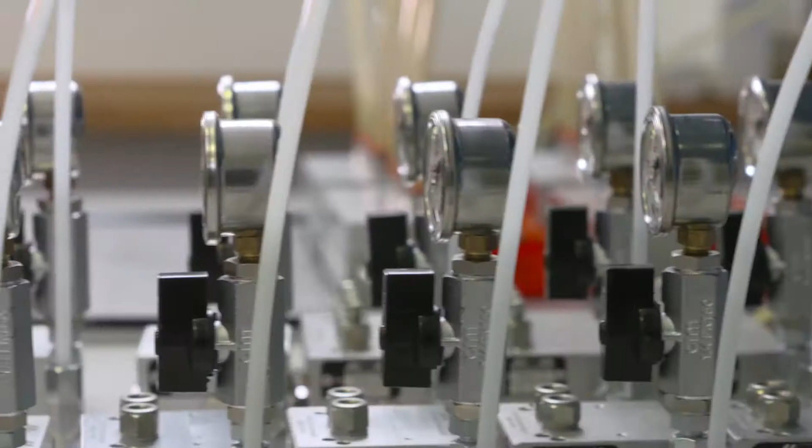MWM Schmieranlagen is an all-Italian story made up of study, insights, passion, creativity and perseverance. It is a story that for over 30 years has brought together creative flair and the rigour of engineering.

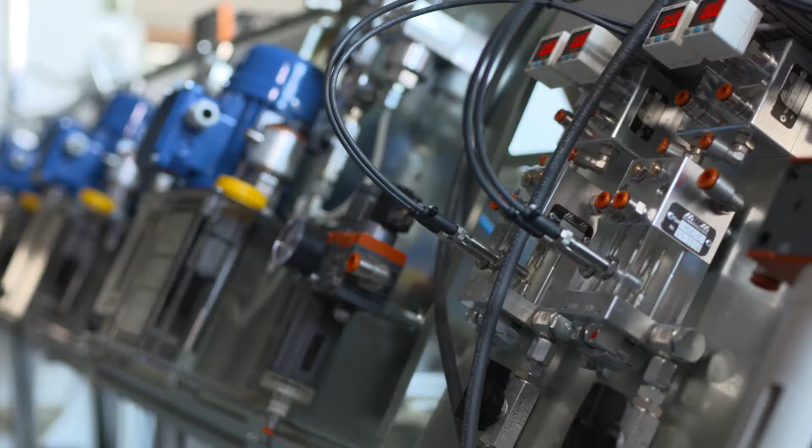MWM Schmieranlagen is a company that operates at a very high level of performance in a niche sector: design and production of minimal lubrication systems. These systems are able to deliver a minimum and extremely exact oil metering for the lubrication of high-speed precision rolling bearings.

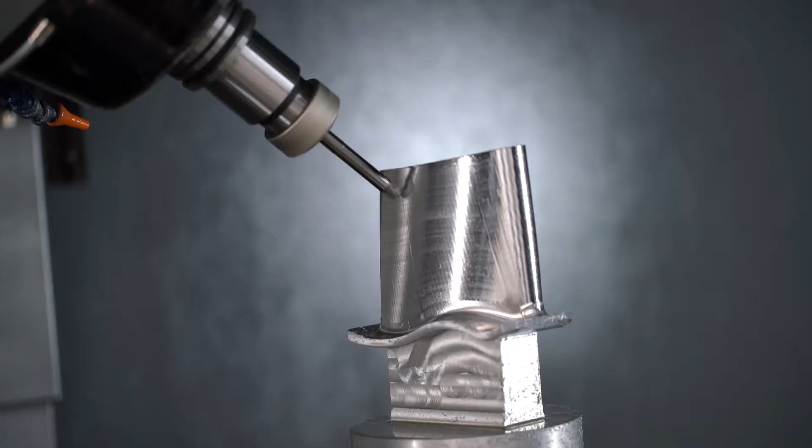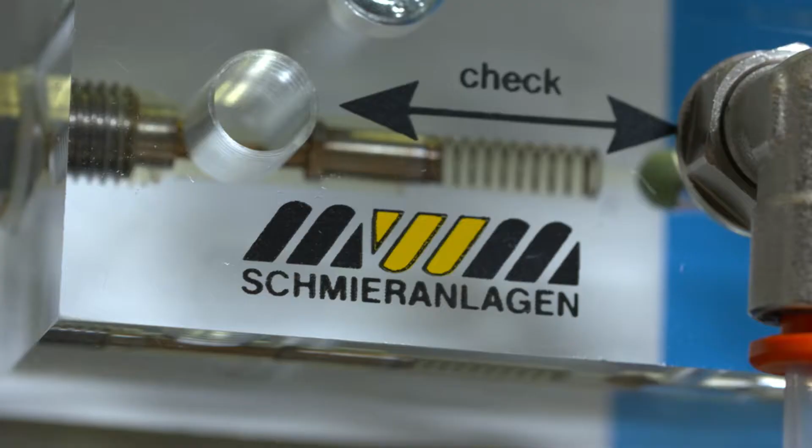Integrating mechanical, hydraulic and optoelectronic elements, MWM produces oil-air lubrication systems with electronic detection sensors. Minimal lubrication is a specialized sector of automatic lubrication technology where tiny quantities of lubricant are supplied in a constant, continuous and controlled way.

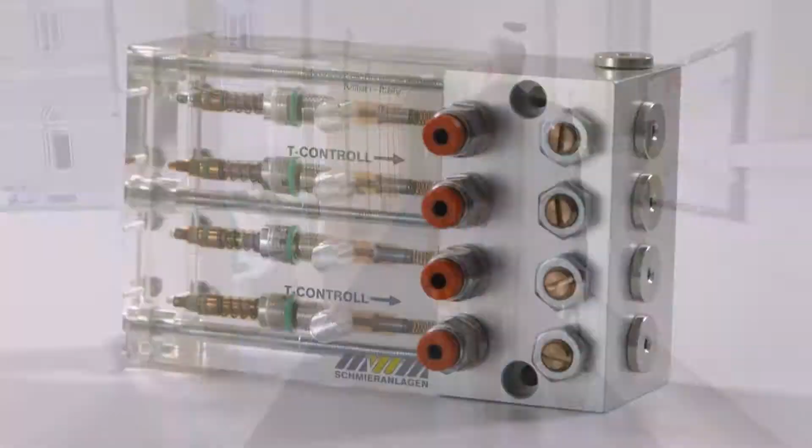The MWM story began in Milan more than 30 years ago, in 1986, when the founder, then 30 years old, graduated in mechanical engineering. And it was thanks to a process of synergic research between the company, its customers and the Politecnico di Milano that the first patents in the minimal lubrication sector came to light.

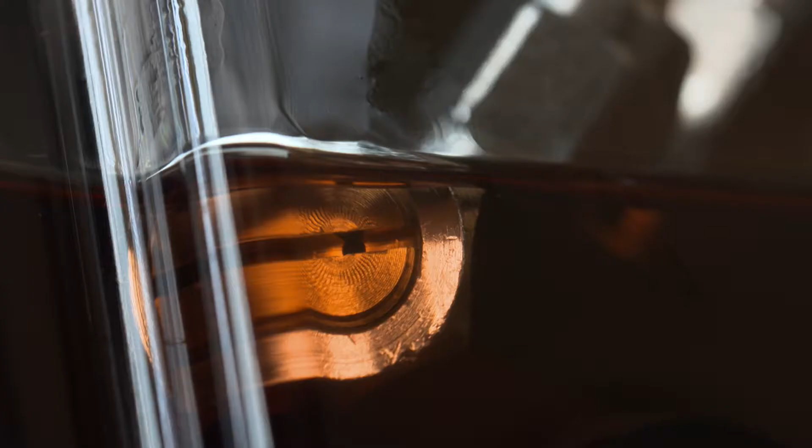MWM was the first Italian company to patent an oil-air minimal lubrication system with an integrated electronic detection device. This technique allows us to combine high performance, efficiency and respect for the environment. Minimal lubrication, MQL, requires far less lubricant and causes less pollution than either mist systems or recirculating oil lubrication systems.

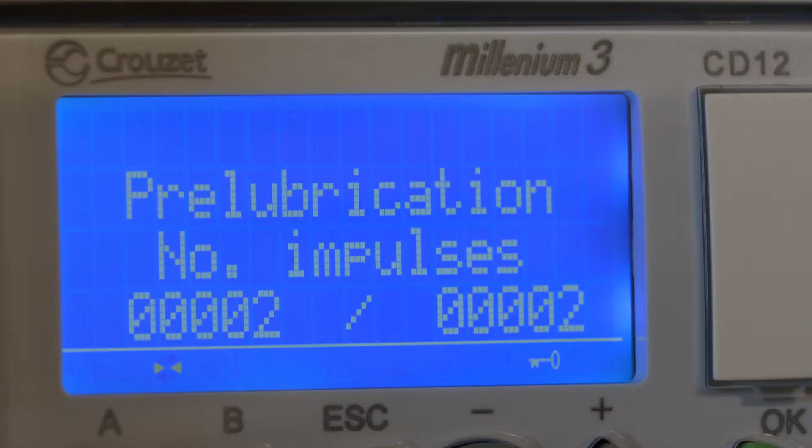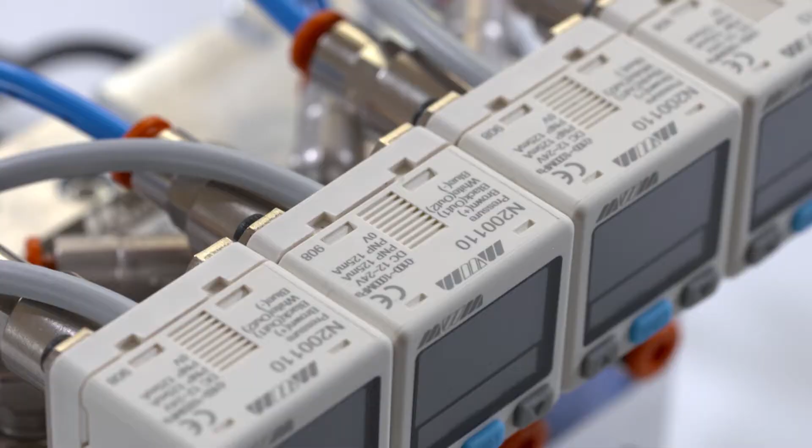We work with micro flow rates by using volumes of just hundredths of a milliliter per hour distributed constantly and continuously. For example, a flow of about 3 drops of oil per hour. And it is the MWM mixers and systems with their own control sensors that enable us to manage the supply of tiny quantities of lubricant with great precision.

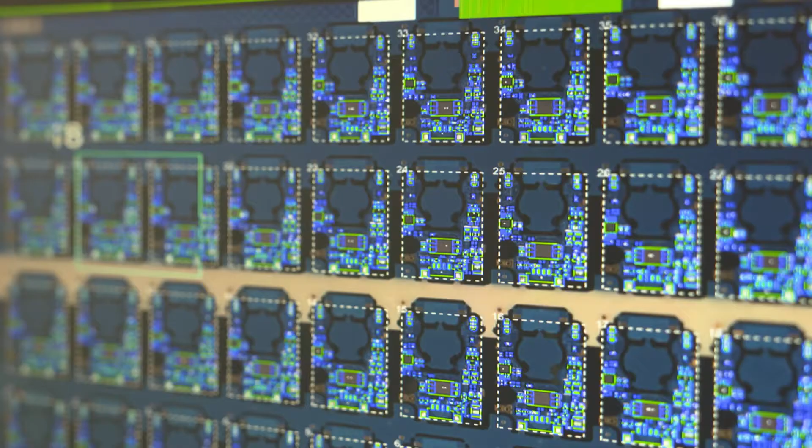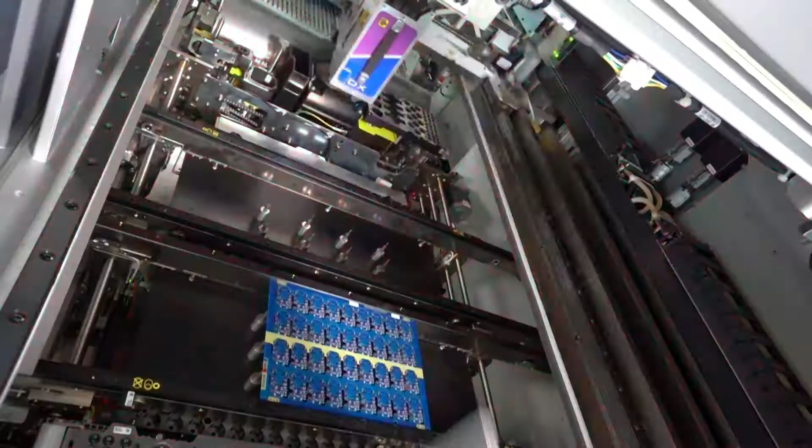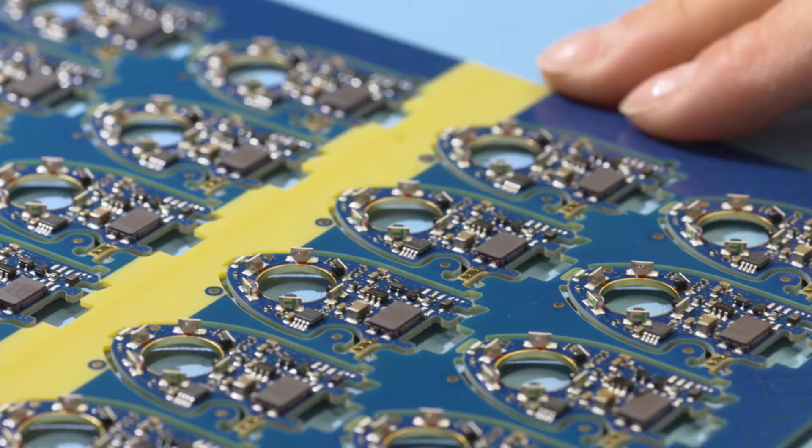Our sensors and electronics are built by a strategic partner which is of great importance to us, BTSR, world leader in the production of electronic sensors, produced with cutting-edge technology and assembled and tested one by one in an air-conditioned and constantly controlled environment. This ensures the continuous detection of the flow and of the whole lubrication system.

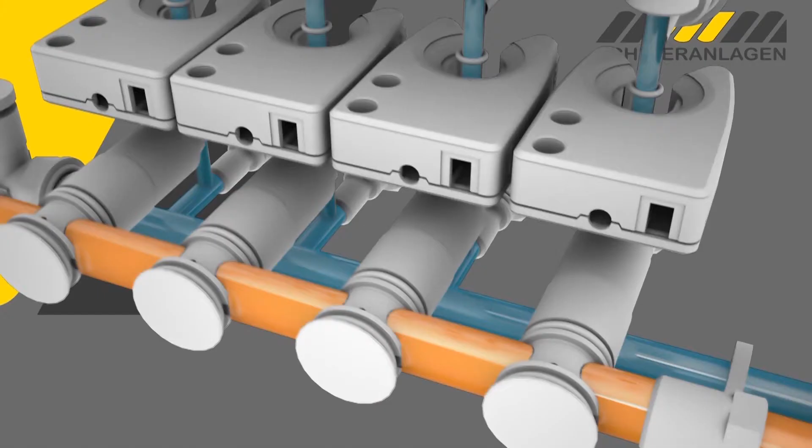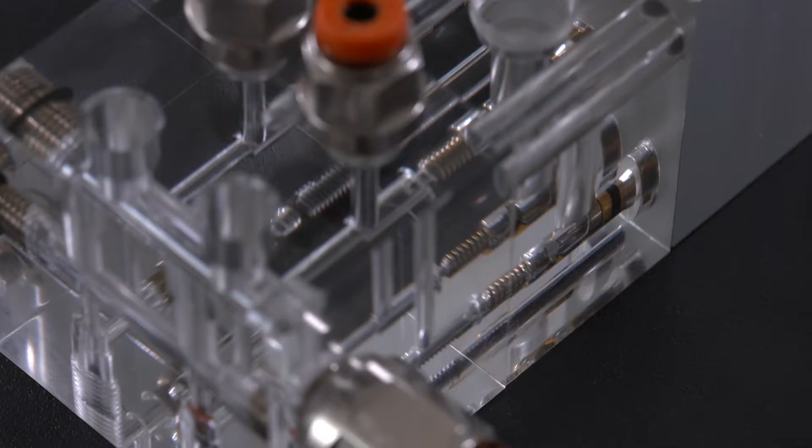This allows higher performance and minimal use of lubricant, avoiding overheating due to hydrodynamic friction, a continually monitored technology enabling a constant minimum operating temperature. Thanks to the customization of the detection software, MWM is able to conceive different systems for each request.

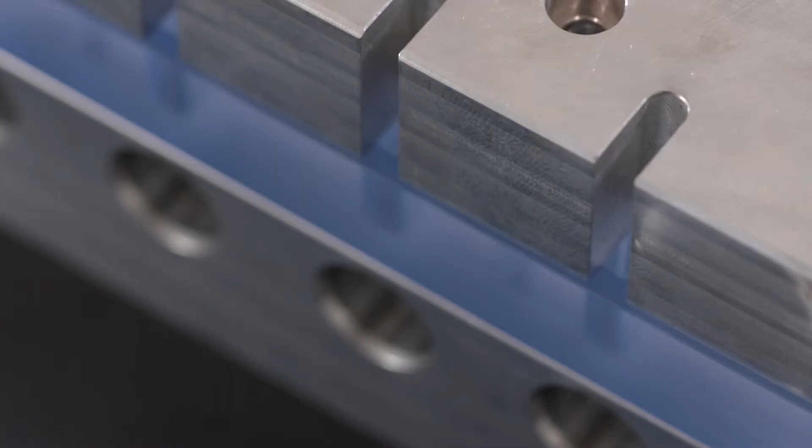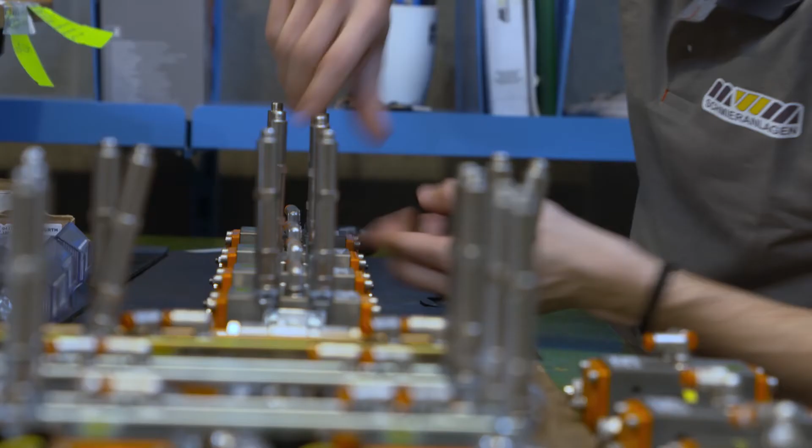MWM products combine craftsmanship and high technological standards. Each MWM minimal lubrication system is assembled manually with individual components which are the product of highly advanced technologies. Among the various services, MWM provides its customers with a series of backup systems which can be sent out within 24 hours from the request.

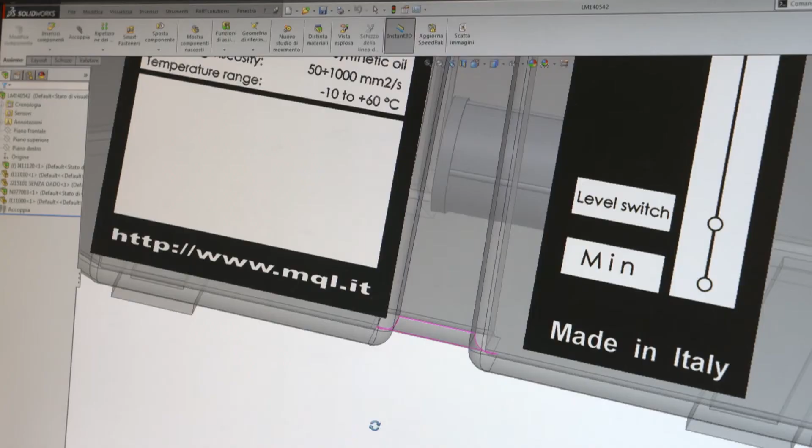But it is research and the constant challenge of finding high-performance solutions which have made MWM Schmieranlagen a leader in the manufacture of compact minimal lubrication units for high-performance industrial machinery.